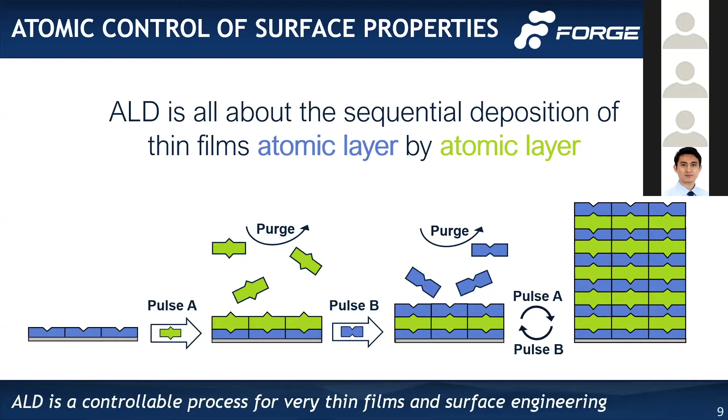If we look at this with actual molecules, this is a representation of aluminum oxide deposition. So it's a spontaneous gas phase reaction on the surface. So it's limited by the number of surface reactive sites that are there. It's a thermal reaction. There are other options that you can do, plasma and electron enhanced deposition techniques, but particle ALD should be mainly around thermal reactions.

So you have a temperature window where you bring in trimethyl aluminum in that first half of the reaction. It reacts with hydroxyl groups on the surface, produces methane. And then once all of those surface sites have reacted, you no longer have methane being produced, and you see the trimethyl aluminum exiting from your reactor, as long as it's in a batch system. And then the second half of the reaction, you bring in water, which reacts with those methyl groups on the surface, reproducing that hydroxyl group, and then you complete the one cycle, building up one atomic layer of aluminum oxide.

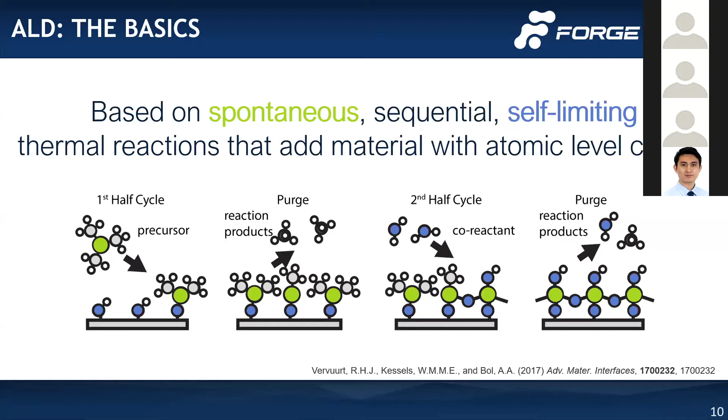I'm going to talk a little bit more about aluminum oxide actually for a catalysis application. So ALD has many different opportunities. Almost the entire periodic table is covered here. This periodic table comes from atomiclimits.com. This is a wonderful resource. I really do recommend going here if you're interested in ALD to see what has been done.

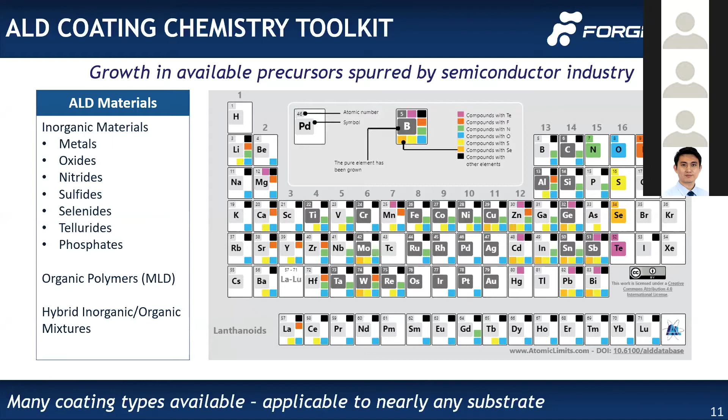For catalysis, some of the areas that are of interest is this middle part, your active material deposition, maybe titania, so your oxides, for undercoats and overcoats. Multi-metal oxides, mixed metal oxides are of interest here. You can also do organic or MLD, or a mixture of organic and metal oxide deposition, to end up with a highly porous oxide surface. I'm going to talk about overcoats. MLD for overcoating is a really interesting application that there's been some work done at BasCat in Germany with BASF. So there's a lot of opportunities here. If you're interested, again, please reach out to us.

So particle atomic layer deposition, analogous to ALD, is basically the same thing. You're getting conformal, uniform, and pinhole-free films onto surfaces. Those could be spherical, non-porous particles. It could be porous materials that have trenches kind of like this, or just long pores, fibers, fabrics. There's a lot of different opportunities here.

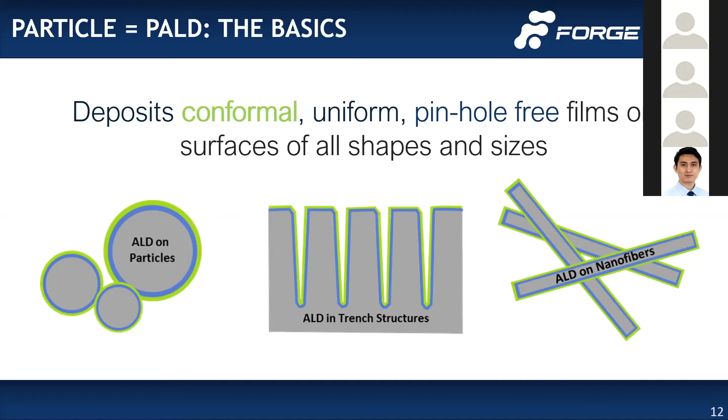So this is what it really looks like once you get to the images. That one on the left is a non-porous particle, conformal uniform coating, 5 nanometers thick. That's probably not what you're going to end up doing in catalysis, but the one on the right might be. And that's platinum deposition onto an oxide surface. And we'll talk more about which one of these, the left or the right, might be the most commercially viable application. But again, particles there in that image, that's what we focus on at Forge Nano.

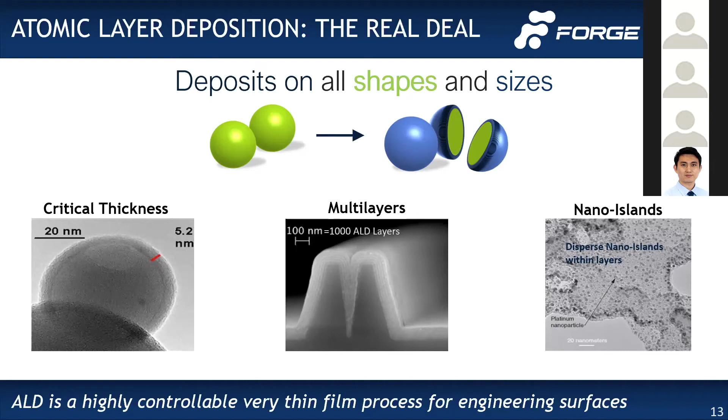So in our R&D systems, when we do particle ALD, most of that is done in fluidized beds. So if you look on that right, the video is a fluidized bed. You have gas flow coming up from the bottom.

It's a rendering here on the left-hand side. You have a porous frit on the bottom that holds the powder within the reactor chamber, and then frits on the top to allow vapor to leave the reactor.

You have the bed zone or fill zone where you put particles, powder into the reactor. That expansion zone where you're reducing the gas velocity so your particles actually drop back down and stay within the reactor, including that disengagement zone so your particles will stay back down within the reactor zone.

These are really efficient for precursor utilization. For ALD, we can get nearly 100% utilization and 100% coverage of the substrate surface in a fluidized bed. Again, so precursor utilization, we can have 95% utilization.

of a platinum precursor, which is very important if you are doing platinum deposition. Platinum alone is very expensive. Precursor is even more expensive.

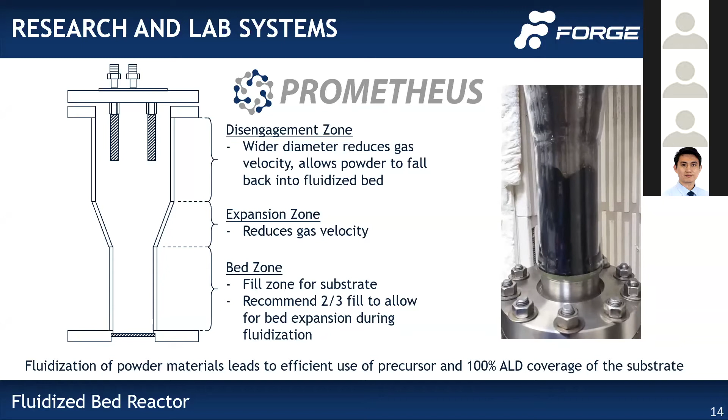So the Prometheus systems are our R&D systems that we offer for sale for particle atomic layer deposition. One on the right, the left is the rendering. The one on the right is one of the systems that we have in-house for our R&D scientists to use. It's a very powerful tool.

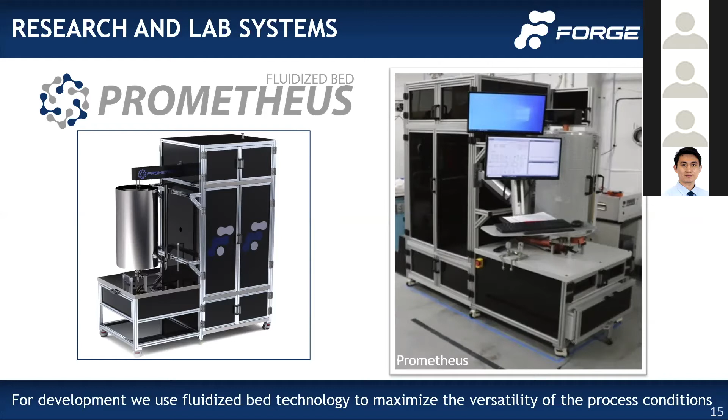You can do a wide range of chemistries. You can do a wide range of sample mass. So you can go anywhere from milligrams up to a kilogram of material production in this system.

The fluidized beds are not the only thing that we use for particle ALD. So staying within the batch realm, we also do rotary reactors. There is a rotary Prometheus version, as well as Lithos, which is a larger scale batch ALD reactor.

So this vessel rotates to coat the material. There's some advantages to that for flexibility in how thick you're depositing that coating. And there are, although, some disadvantages in that system, which is why we have so many different kinds of systems.

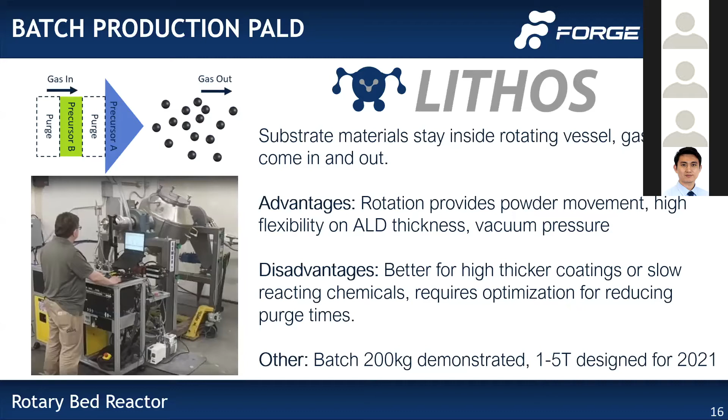So in this, we can go up to 200 kilograms for a demonstration. You can see how large it is right there. And we have designs to go even larger than that. I will review our different systems again at the very end of this.

So moving from batch, because at Forge Nano we focus on commercialization of materials. So if you're going to be producing thousands of tons or millions of tons per year, you need to go to very large production pretty quickly.

So we use the batch systems for development of materials. We prove out their usefulness, and then we go up to our continuous production to get the economics of that production.

So CIRCE is one of our continuous production ALD systems. This has substrate moving horizontally on a vibrating bed, and we can get to 3 tons per day production throughput on this system. It currently exists.

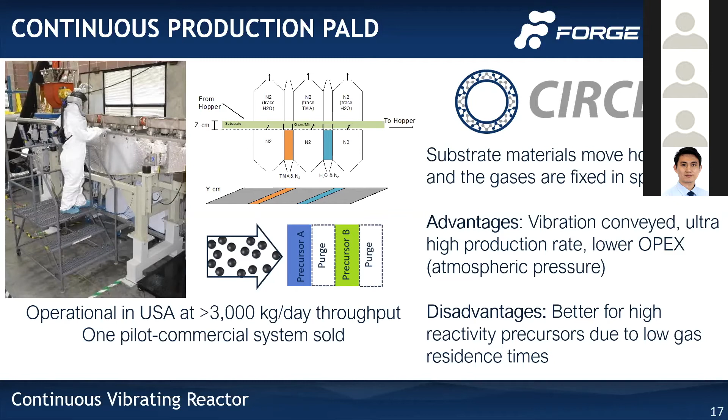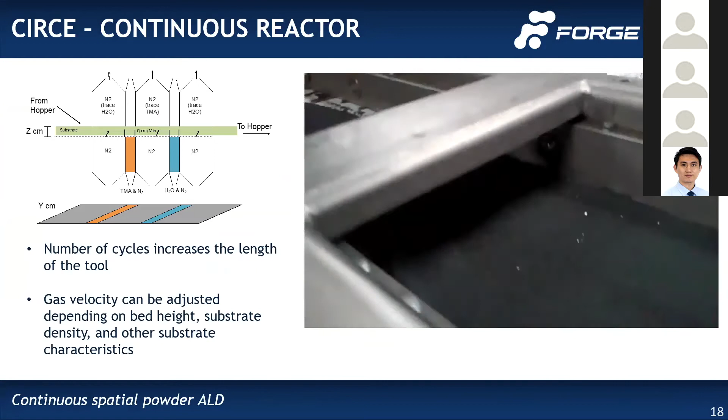So this is really fun. I like showing this video. If you like this portion of my talk, please go to the AVS ALD 2020, and our VP of R&D, Arrelaine Dameron, gave a talk about all of our different systems and went in depth of how they work.

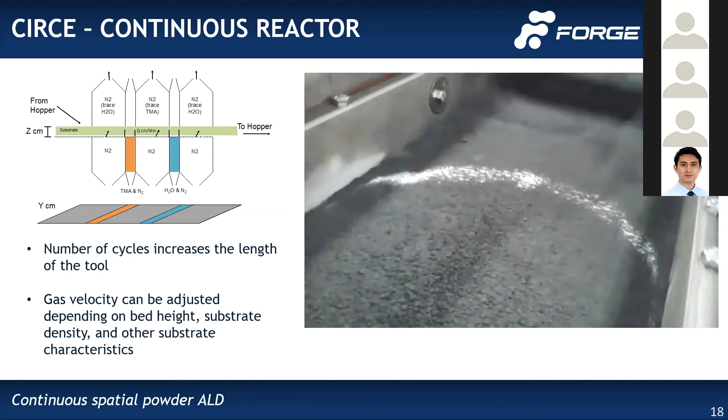So on this continuous vibrating bed, the powder moves along and it goes through those different zones right there. It's going through an exposure zone to the different precursors. And again, this is an aluminum oxide deposition.

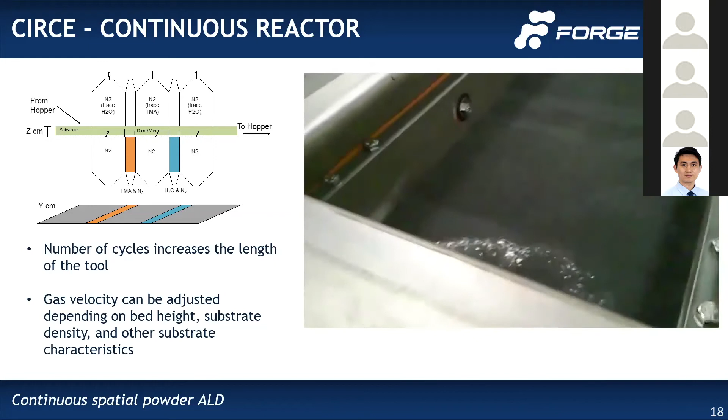So you have trimethyl aluminum and water. That powder just moves along and goes through about 3 different cycles and it gets to the end of the system, and then that powder is collected.

So this is just a little bit slower video showing that powder motion. So this is fun. This is what we do. This is what we focus on at Forge Nano.

So the R&D of the application space, we work with customers, but we can get to the commercialization, full-scale production of that material.

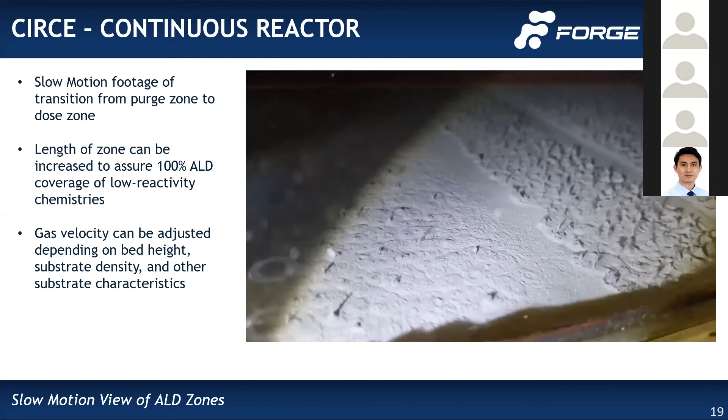So one last system is our semi-continuous production systems for particle atomic layer deposition, and this is Morpheus. So rather than a horizontal moving on a vibrating bed, this is using gravity and pneumatic transport to move powder vertically through different systems to get the cycles needed.

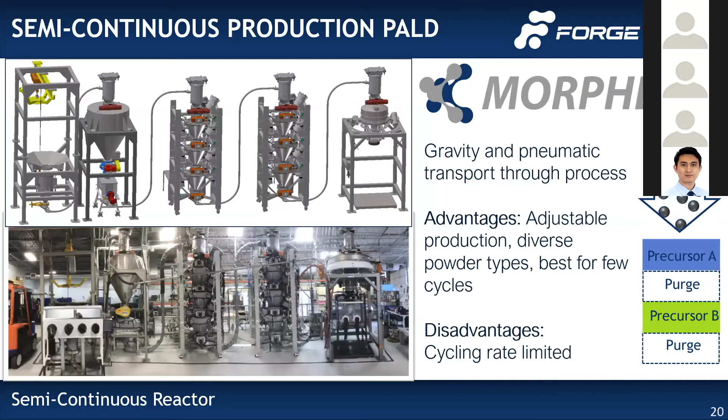All right, so Forge Nano, we work on particle atomic layer deposition. There are many different opportunity spaces for this. The first one is in energy storage, where we've had the most success. Our second is in catalysis, which I'm going to talk about today, pointing out some references and review papers, the opportunities that have been explored, and encouraging people to continue looking for other opportunities. Other application areas are thermal fillers, powder forming or 3D printing, separations, adsorbents, and membranes. We've worked in almost all of these application spaces. The top 5 are the main ones we're focusing on, but we absolutely work in most of these. If you have some ideas, please reach out.

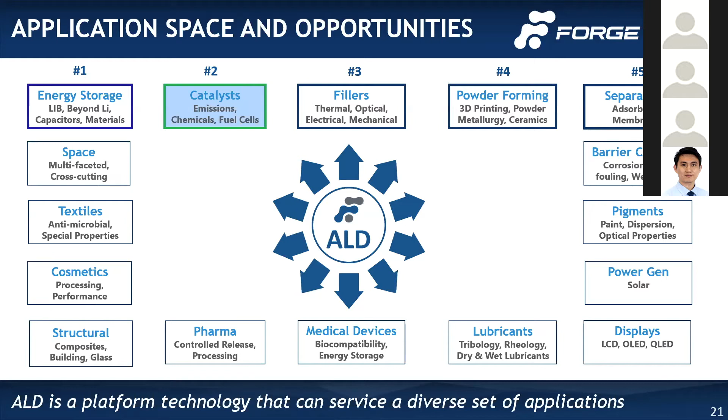All right, so now we're going to switch over to talk about ALD for catalysis specifically, giving you all the background about Forge Nano and where we focus on commercialization.

So this is some of our data for DeNOx catalysts with an overcoat. I'm going to talk about the 3 different ways we see ALD being useful for catalysis. One of them is overcoats, having an oxide deposited on top of your active catalyst material. The images here on the left show a comparison of ceria deposited onto a catalyst, and this is zirconia deposited. It's not the same material, but the main point is that ALD will be uniform everywhere on the surface compared to sol gel, where you get some clumping. You can see a bit more of that pink clumped around, not as uniform as you get with an ALD catalyst.

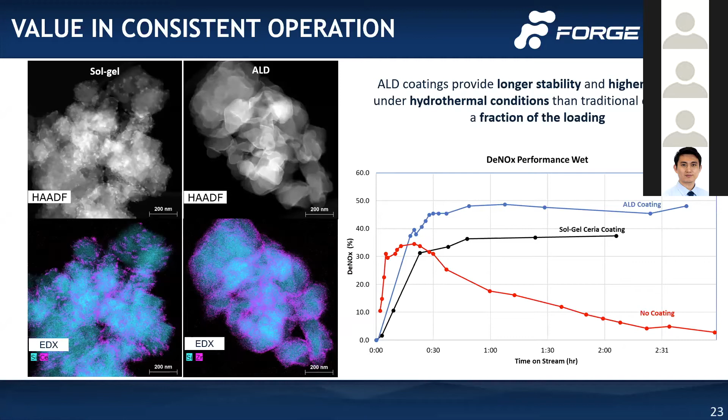On the right, that performance, the goal of catalysts is long-term stability. When you make a process, you want to ensure consistent performance day in, day out. It's not going to shut down unexpectedly, and that's where you get your best economics. So designing your catalyst to perform consistently is one of the advantages of ALD. An overcoat can maintain performance over a longer period of time than without having an overcoat on your catalyst. There are also some other benefits we'll talk about.

So this is my viewpoint of saying that ALD for catalysis can basically be like a treasure map. There are opportunities out there waiting to be found, and I'm encouraging people to go find them. ALD has been used for fuel cells, for hydrogen production, for dehydrogenation and hydrogenation, photocatalysis, methane reforming, biochemical conversion. I'm going to also talk about Fischer-Tropsch, which is what I did my PhD on. So there are other opportunities out there waiting for ALD.

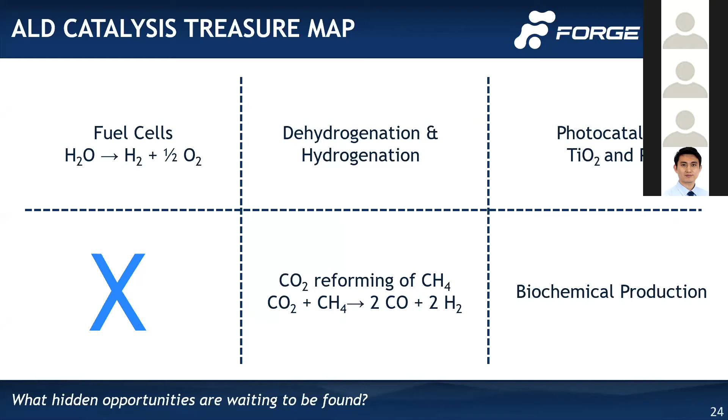In the ALD toolbox, this is what I was mentioning: we have overcoats, typically an oxide, but it could be some other material like a mixed metal oxide, deposited on top of the catalyst that's made in a standard method, maybe incipient wetness. Or you have the active material deposition, where you can use ALD to deposit platinum, palladium, rhodium, ruthenium, cobalt. Or you have undercoats, where you deposit an ALD layer, maybe a mixed metal oxide or an oxide, onto the base support, and then use a standard method like incipient wetness to deposit your active material, or use a combination of ALD methods to build your catalyst from the bottom up, which I'll also point out.

So the benefits you're looking for in catalysis are durability, long lifetime, higher selectivity and higher yield to the desired product so that you have less separations in your processes and more energy efficiency. And then activity, which will also increase yield of the desired product.

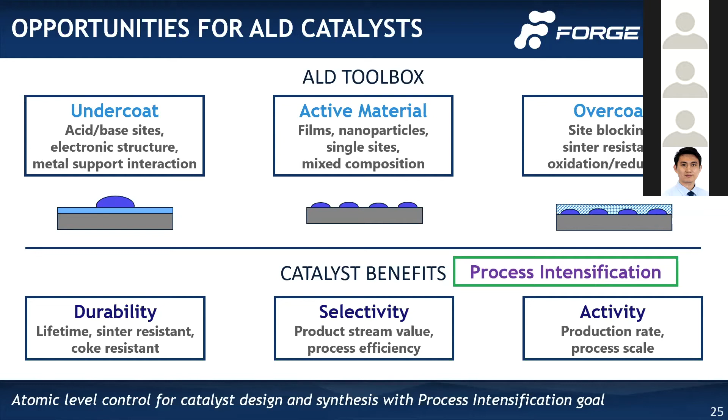As I mentioned in my title, this process intensification is a goal of chemical manufacturing so that you have lower energy usage and higher production of the most desired product. You get there by increasing your selectivity and your yield, decreasing the amount of separations needed in the process. I'm a chemical engineer by background, so process design and process control is part of what we think about when we're looking at catalysts.

So I'm going to point out 6 different review articles here that I recommend people go look at if you have not looked at them before. The first one is with Jeff Elam, Neil Dasgupta, and Fritz Prinz. They're 3 great experts in ALD. Jeff Elam is a great colleague of ours at Forge Nano. He recently purchased a Prometheus system, so they have that at Argonne National Lab for some of the development they're doing.

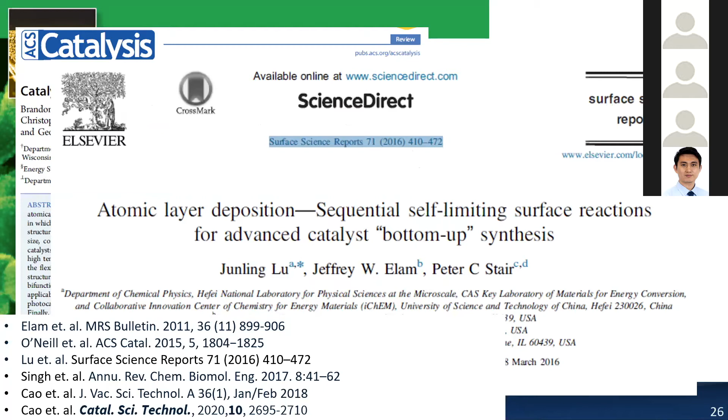The next one is this catalyst design with atomic layer deposition. It was published in 2015, another great reference for all the different things that have been done with ALD and catalysis. Here's another one with Jeff Elam and Peter Stair at Northwestern, and Junling Lu, who also has another review paper and a lot of background work for ALD and catalysis. So bottom-up synthesis, I mentioned that before, and we'll talk about that again.

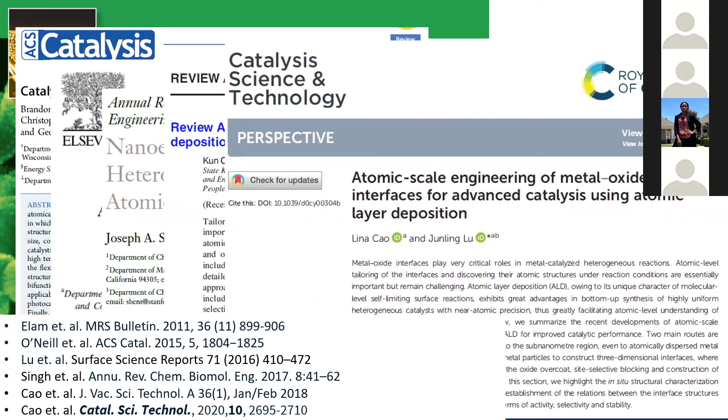This is on nanoengineering of heterogeneous catalysts with Stacey Bent, from Stanford. And this review article is on catalyst design via selective atomic layer deposition and atomic scale engineering of metal oxide interfaces, again with Junling Lu.

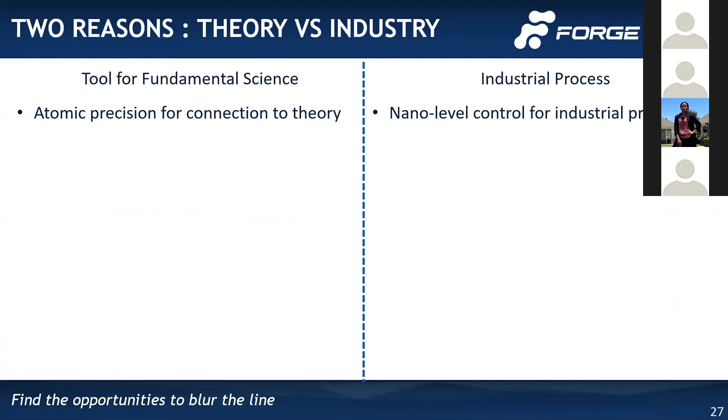So there are two reasons to do ALD for catalysis. It can be a tool for fundamental science, which typically will not make it to industrial processes, or it can be used for industrial processes. So there are three different ways of doing ALD in combination for catalysis: active material deposition, overcoats, and undercoats.

In our opinion at Forge Nano, active material deposition is still a great tool for fundamental science, but it's not yet to the point of being an industrial process. Whereas undercoats and overcoats are much closer to industrial processes, having nano-level control at industrial scale. There are opportunities to blur those lines and bring undercoat and overcoat technologies back toward fundamental science, and with time and effort, active material deposition may transition to being viable for industrial processes.

The fourth thing I want to bring up is area selective ALD, where you're controlling where your active material is on the support. That has an opportunity to become an industrial process if you can increase the selectivity.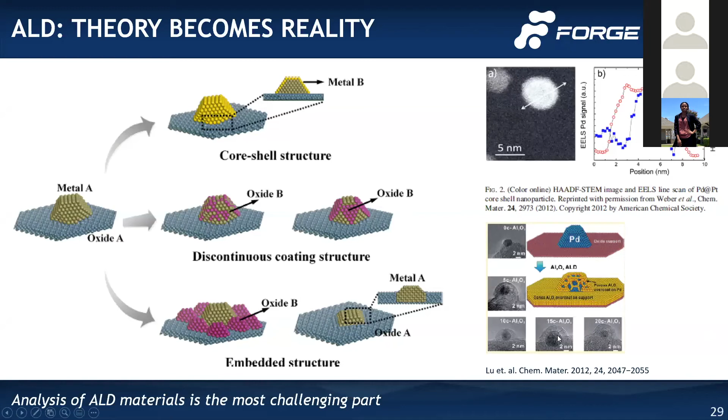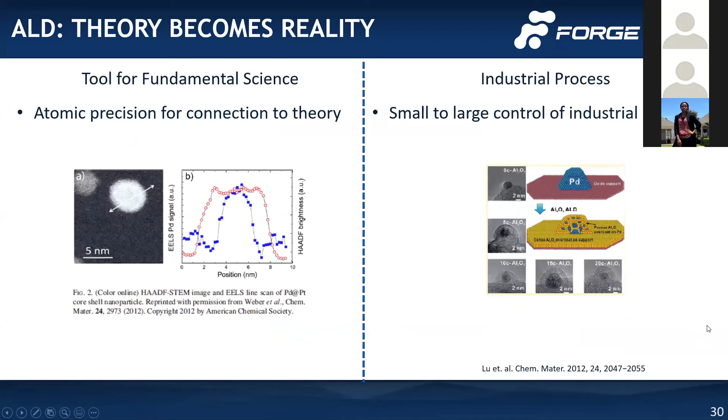So bringing this back: core shell structure is great fundamental science, but it may not be industrially relevant yet. Overcoats are getting much closer to being industrially relevant catalysts.

For area selective deposition, this was in the review paper, and here's the reference to the original work. This takes pristine graphene, creates oxide sites, then deposits palladium onto those specific sites, giving you almost a single site palladium reaction. The opportunity here is high selectivity — you can get high yield to a single desired product and eliminate secondary reactions in your stream, improving overall process economics and potentially enabling commercialization.

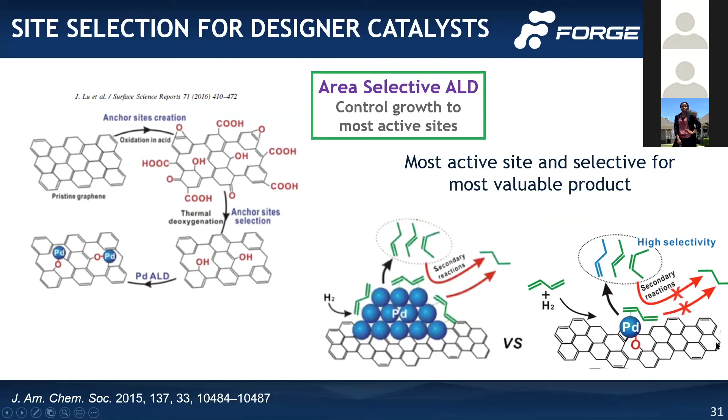So I'm going to review my own work. My last name was Van Norman. This is from the University of Colorado at Boulder, where I did Fischer-Tropsch synthesis with an ALD catalyst. It was a cobalt deposition, a metallic deposition of cobalt.

Background on Fischer-Tropsch synthesis: it is a structure-sensitive reaction. It takes carbon monoxide and hydrogen and makes synthetic oil. If you look at the conversion of carbon monoxide per amount of cobalt, you have a peak around 7 to 10 nanometers, as shown in the last 100 years of research in Fischer-Tropsch.

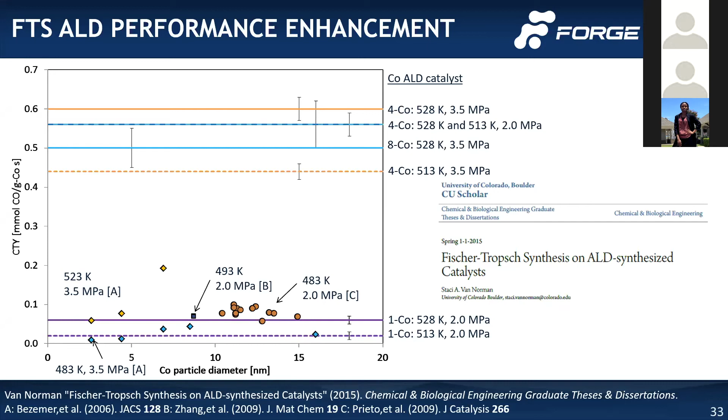In comparison, with ALD and increasing the number of cycles of cobalt deposited in a metallic method using cobaltocene and hydrogen, with one cycle you're within the same turnovers or yields per cobalt as a normal Fischer-Tropsch synthesis catalyst. But if you increase the number of cycles to 4 and 8, we're much higher than anything ever reported before — in fact, 3 times higher than the highest efficiency at a similar conversion of carbon monoxide and selectivity. It's important to select points with similar conversion and selectivity so we're not comparing erroneous points.

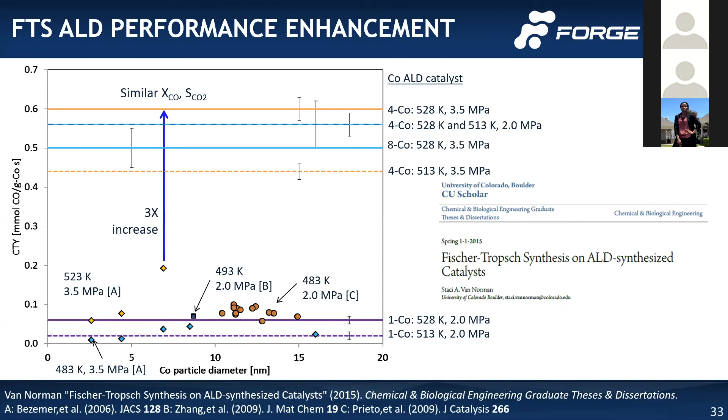So like I said, we're making synthetic oil from carbon monoxide and hydrogen. Mainly it makes a lot of water — really, they should call it a water production reaction.

Again, this is that same data. It's a structure-sensitive reaction. Once you get up to 7 to 10 nanometers, the turnover frequency stabilizes — you're not using any of those other cobalt atoms interior to the particle. If we bring in the ALD data, the one cycle catalyst looks like very small nanoparticles, around 1 nanometer, which is what we'd expect. But if we look at the 8 cycle catalyst, here are the error bars — we're much higher than any turnover frequency you would expect to see.

Towards the end of my PhD, we looked at other studies comparing single crystals. They took a tungsten single crystal in an ultra-high vacuum chamber, deposited cobalt metallically onto that surface, then transferred it to a reaction chamber and looked at the turnover frequency with increasing temperature.

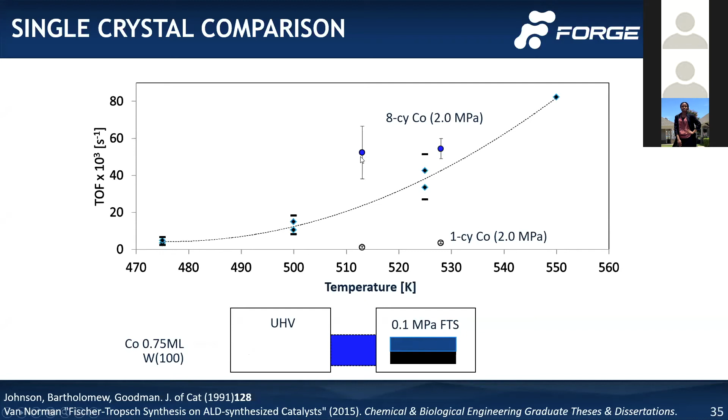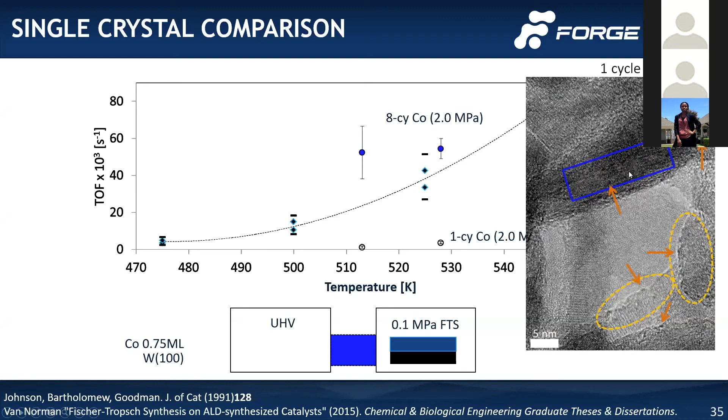When we plot our cobalt ALD catalyst on here, the 1 cycle sample has very low turnover frequency, as expected for very small nanoparticles. The 8 cycle cobalt is up here within the error — these are the error bars for that turnover frequency study, and we're within the error of their turnover frequency. So it appears the cobalt was depositing more in a single crystal form. What we saw on the surfaces is that you actually have very small nanoparticles, but also these crystalline surfaces — so it's likely some of the cobalt was depositing as a single crystal on that support.

Okay, I'm going to transition now to undercoats and overcoats. When I was at the end of my PhD, I was doing an ARPA-E project where we looked at the commercial viability of the Fischer-Tropsch synthesis reaction. We determined that even though we improved the Fischer-Tropsch synthesis, the syngas production was not viable, which made the entire process not viable. So I'm going to highlight where dry reforming of methane can be improved by ALD.

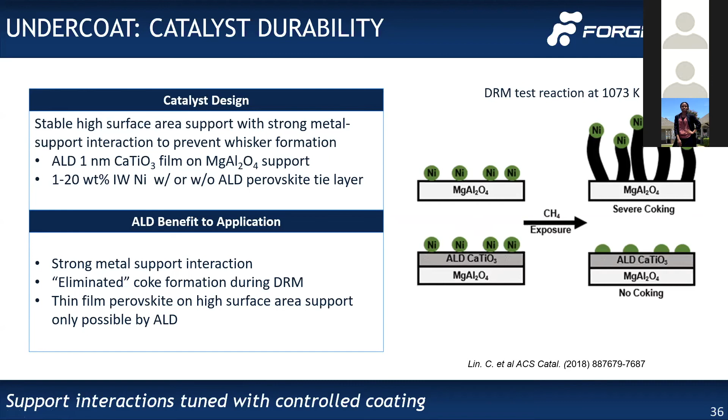This is a paper from Penn State — here's the reference. It has a calcium titanate ALD layer and nickel deposited by incipient wetness, same nickel deposition on both, just with an ALD layer added. The ALD sample, when exposed to methane, did not have carbon nanotube or carbon whisker formation, which on a standard catalyst in dry reforming of methane causes the nickel to be pushed off the surface, reacting so much that carbon nanotubes or whiskers fill up the reactor and plug it.

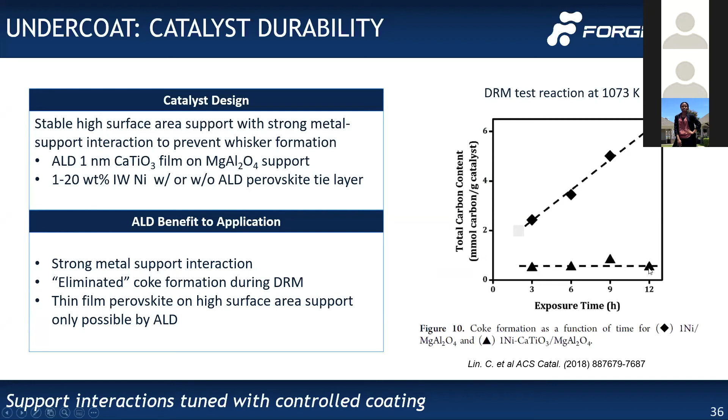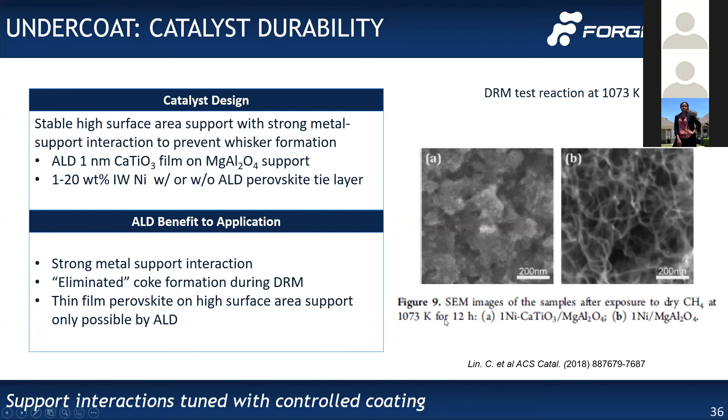So you can stabilize your platinum by having an overcoat, which lets you reduce the amount of platinum needed. Because over time, if you're going to operate at 600 degrees Celsius, you have to have more platinum there to maintain the same activity at end of life than you would if you have an overcoat on the material.

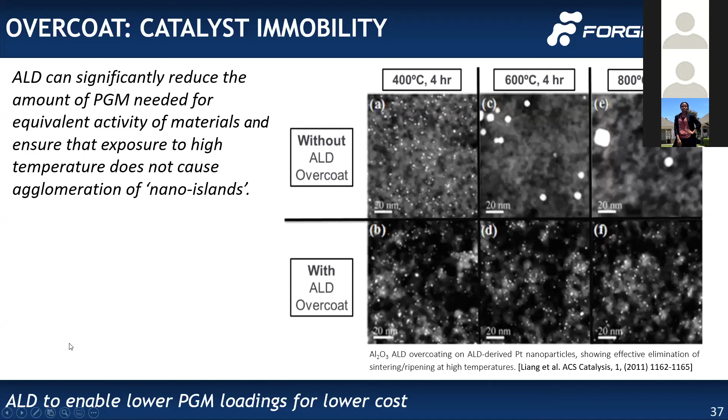So as I mentioned at the beginning and in the title of this, process intensification is increasing selectivity and yield, as well as increasing the durability of your catalyst. This is a really great example of ALD increasing your process intensification in an industrially relevant application.

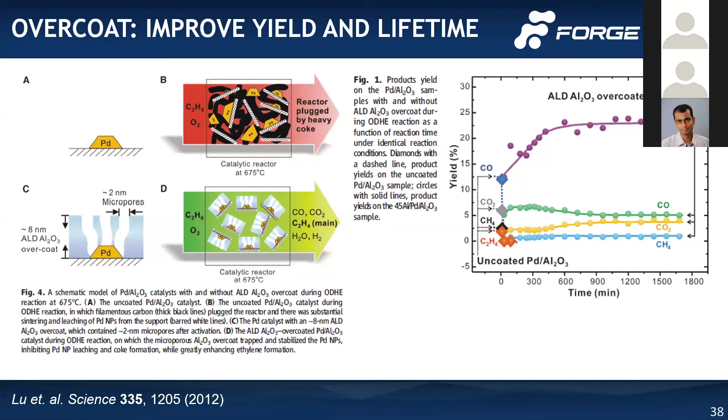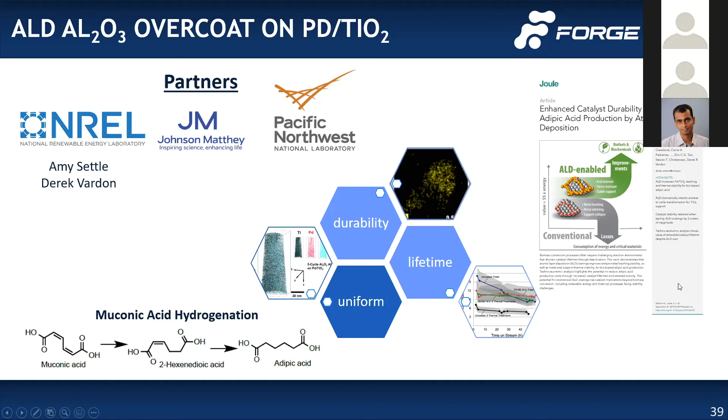And actually we are working with commercial partners. This is now work at Forge Nano with partners we've worked with at Pacific Northwest National Labs, at NREL, specifically Amy and Derek there, and Johnson Matthey. This was a biochemical conversion, so muconic acid to adipic acid. Over here on the right is the publication for bio-based adipic acid. We did an overcoat of 5 cycles of alumina onto a palladium on titania catalyst.

One of the questions is: is ALD uniformly deposited throughout a porous structure? This data here is showing that the alumina throughout a porous structure is depositing uniformly. As long as you are operating within an ALD window and you let it run to completion, you will get deposition everywhere. That's how ALD works.

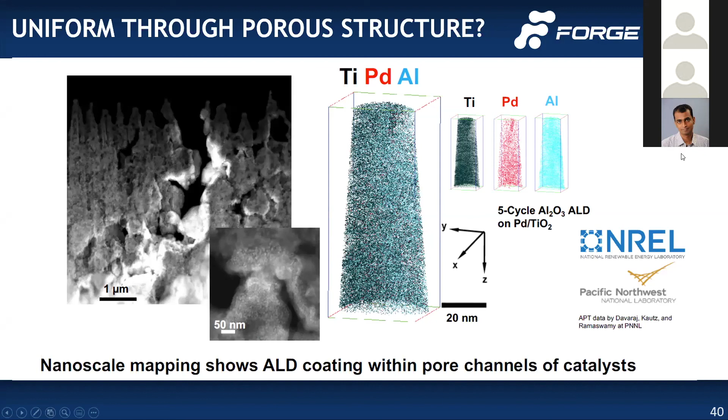So here is some of the data, for the regeneration and reuse of the catalyst. That blue decreasing data is a fresh catalyst without an overcoat, and here is no overcoat after 5 thermal treatments or regenerations. So you have a significant drop in that conversion, or productivity of the catalyst, over time after you regenerate it. These blue, green and orange lines are a fresh catalyst with an overcoat, and after those same 5 thermal treatments, you have the same conversion over time. So being able to maintain your catalyst with regeneration is one of the benefits of overcoats.

The other benefit here in this example was that we could actually stop leaching of palladium off of the surface. This is a very big advantage as well, so you're not losing your active material to the process.

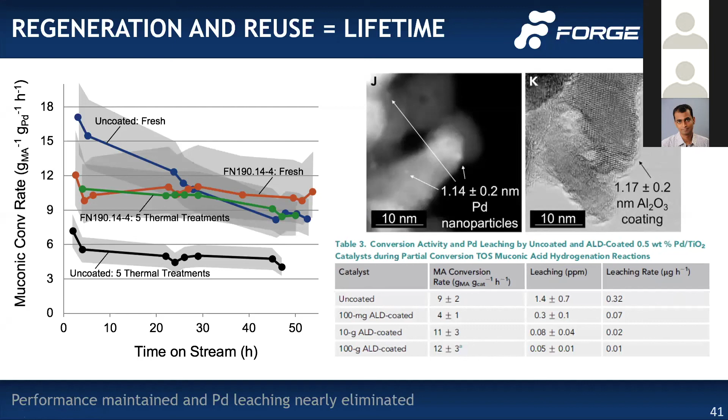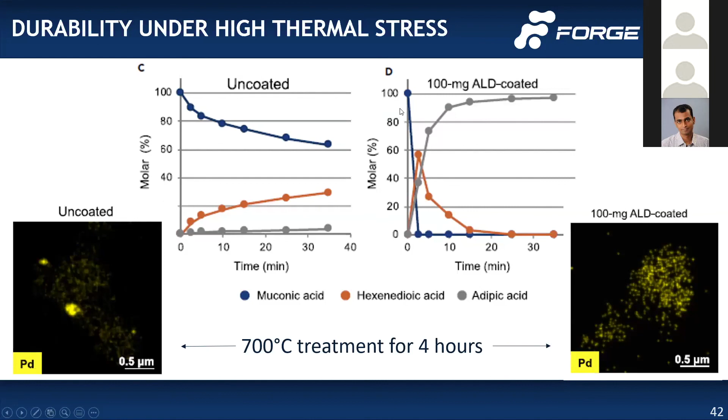This is the same study, same work, with thermal treatments at 700 degrees C. This is showing similar results to Jinhua Liang's work with platinum, except this is for palladium, showing the sintering. At 700 C for 4 hours, palladium sinters without an overcoat, versus with an overcoat you maintain the dispersed palladium on the surface. Because you're maintaining that dispersion, you're actually maintaining your reactivity.

Final study I want to point out that we're doing at Forge Nano is an overcoat on platinum. This one is a little bit interesting because we're doing aluminum oxide overcoats onto an aluminum oxide support. It's a bit of a complication depositing A onto A, but there actually is some difference between an ALD aluminum oxide versus a support aluminum oxide. We hope to have some of that information ready to share soon; that publication will be out soon. Our partners on this work are Zhang Liu at Argonne National Lab and Lee Abrams, primarily Lee Abrams at UOP, and that's an Advanced Manufacturing Office funded project.